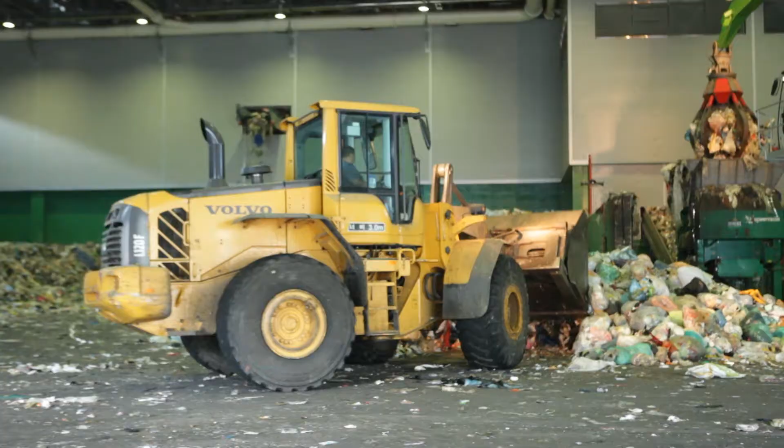The project of utilizing waste as fuel, which uses waste as the source of energy, resolves the chronic problems of waste treatment, leads to affordable production cost, replaces fossil fuel in this era of high oil prices, and reduces greenhouse gases, so it is receiving limelight as future energy.

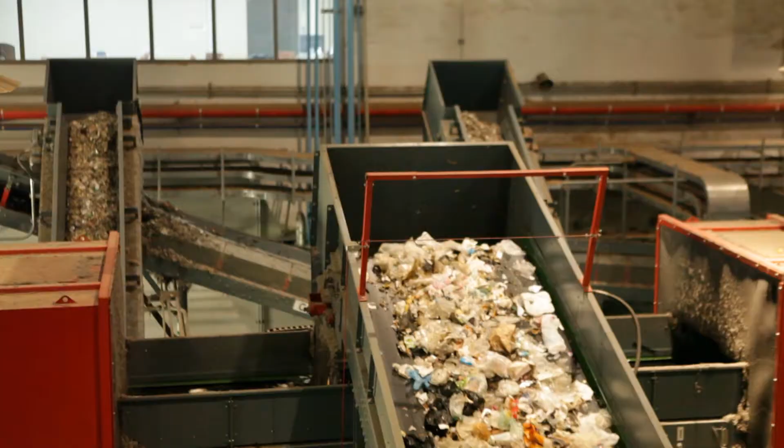The project of utilizing MSW as fuel moves away from the existing landfills or incineration, mechanically classifies the waste for treatment before being turned into fuel. It is a groundbreaking project that transforms waste into renewable energy. Moreover, it is a core project of green growth that is able to generate additional revenue by securing CERs.

The project of turning Busan metropolitan city's MSW into fuel and the execution of the private investment business was implemented in BTO method together with the main office of Busan City, busanE&E, the principal, consortium of construction companies, POSCO E&C, and 3 others, Korea Environment Corporation, the institute that managed and supervised the project.

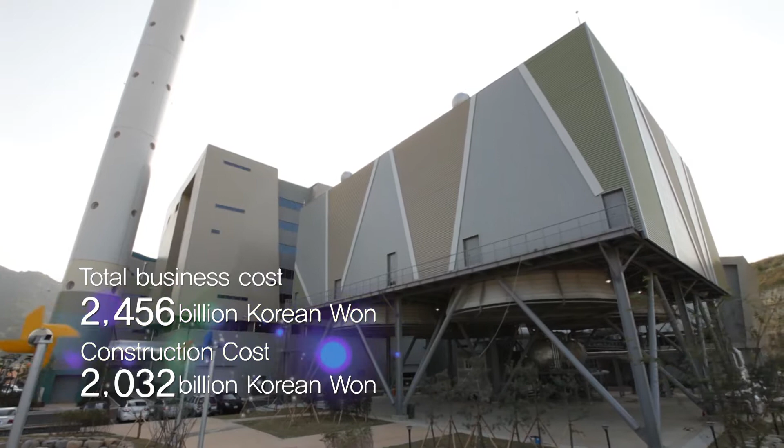The construction took place on a land of 23,932.36 square meters out of the lot area of 66,653.7 square meters in the entire Saengok-dong in Gangseo-gu, Busan metropolitan city.

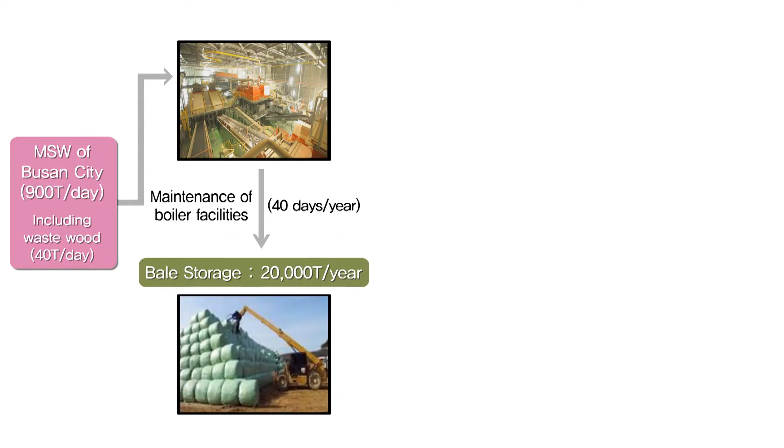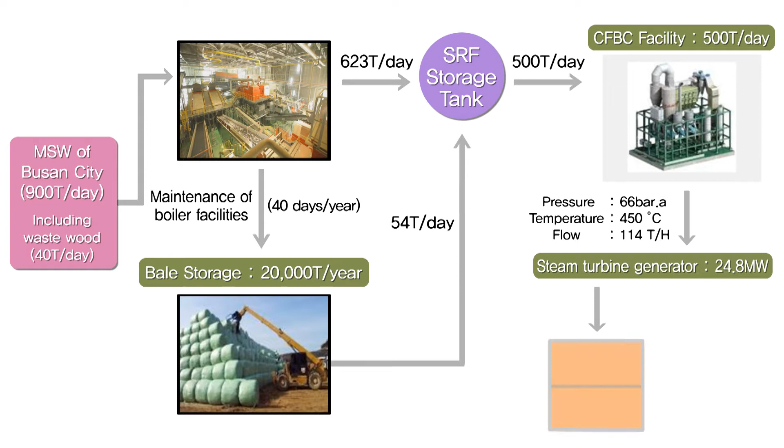The project of turning MSW into fuel involves delivering MSW, classifying them, producing SRF, incinerating, and producing electricity. It is an innovative next-generation growth engine, and the annual treatment quantity of waste has reached 234,900 tons, generating 196 gigawatt-hours of electricity annually.

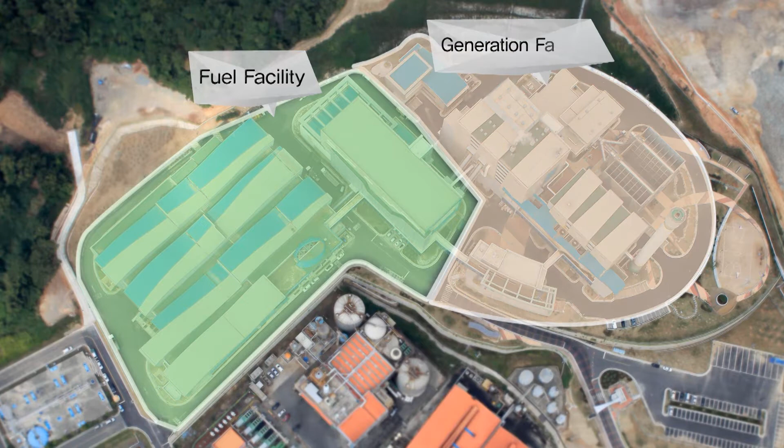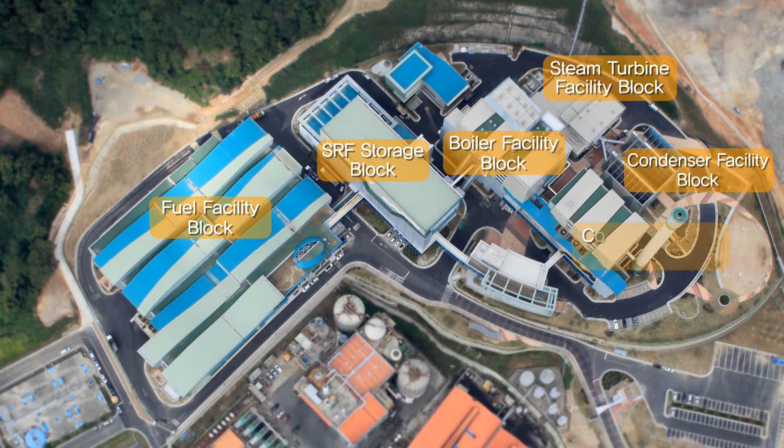The facilities of turning MSW into fuel and the private investment project for generation facilities are largely categorized into fuel facilities and generation facilities. The facilities are comprised of turning MSW into fuel facility block, SRF storage block, boiler facility block, steam turbine facility block, condenser facility block, combustion gas treatment facility block, and management block.

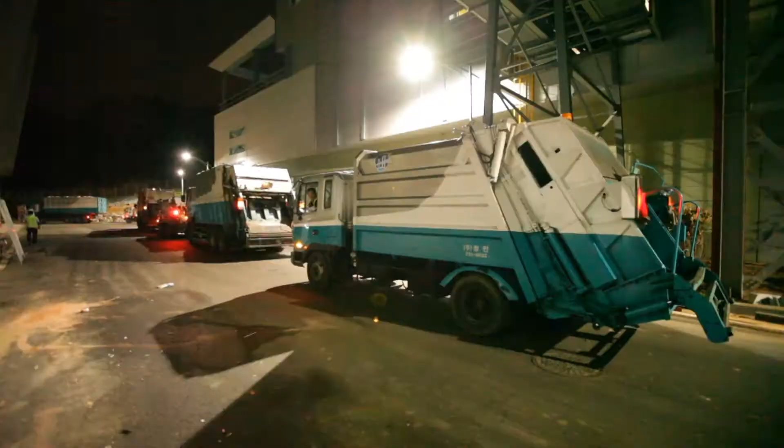The MSW fuel facility block has been designed and constructed as an environmentally friendly facility with logical flow of production process and maximized efficiency. 900 tons of waste material is collected per day from each of the 16 boroughs and county regions throughout Busan metropolitan city. The collected waste material is weighed using a self-weighing meter, which is then transferred and unloaded in the waste entrance zone using a wheel loader.

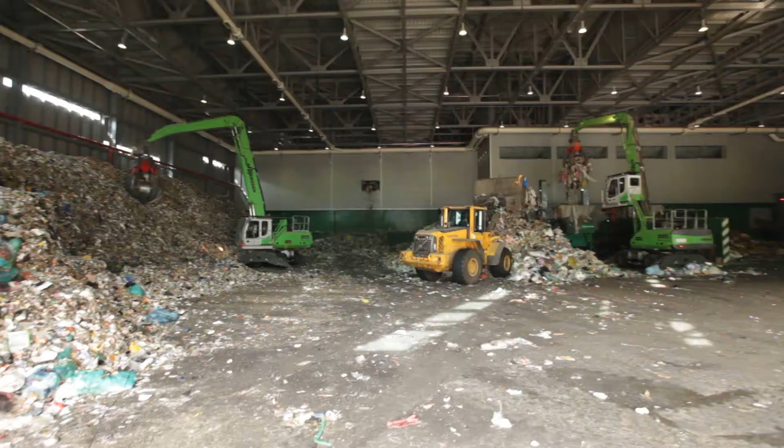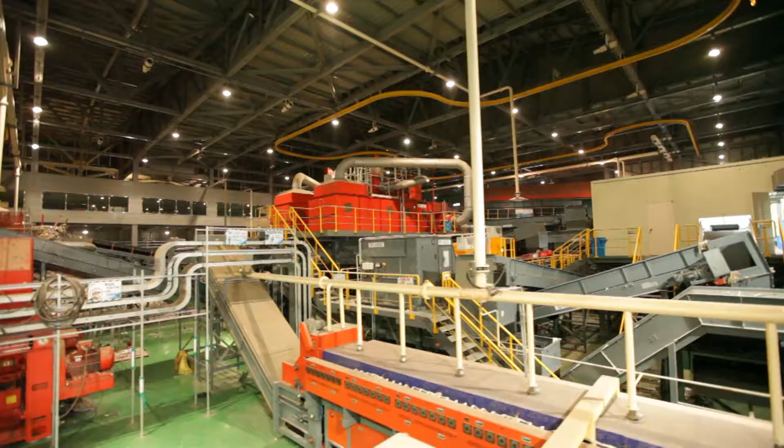The temporarily stored domestic waste material is transported to the collecting zone using a wheel crane. It is then crushed to sizes of under 200 millimeters and transferred to the mechanical pre-processing facility. In trommel screen, which is a screen device, the waste is separated into that below 200 millimeters and that above 200 millimeters. The waste that is above 200 millimeters is transported back to the delivery site.

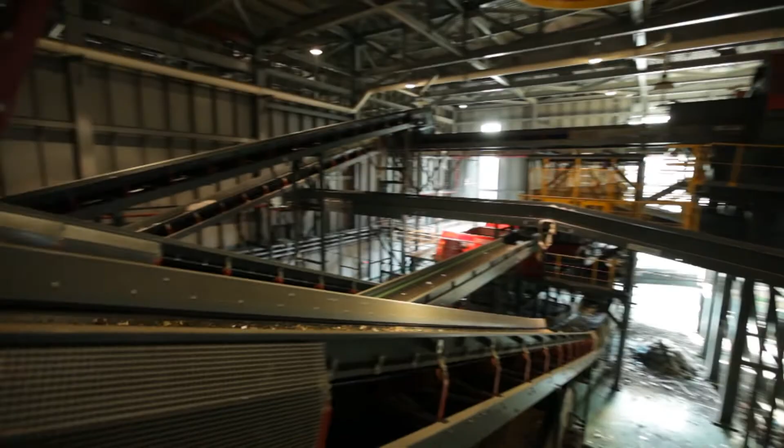The separated waste is classified into below 80 millimeters and 80 to 200 millimeters in size, and the waste that is between 80 to 200 millimeters is transported to the pneumatic separator to be separated into heavy and light substances. The heavy substances undergo a vibration feeder and are transported to the optical sorting machine.

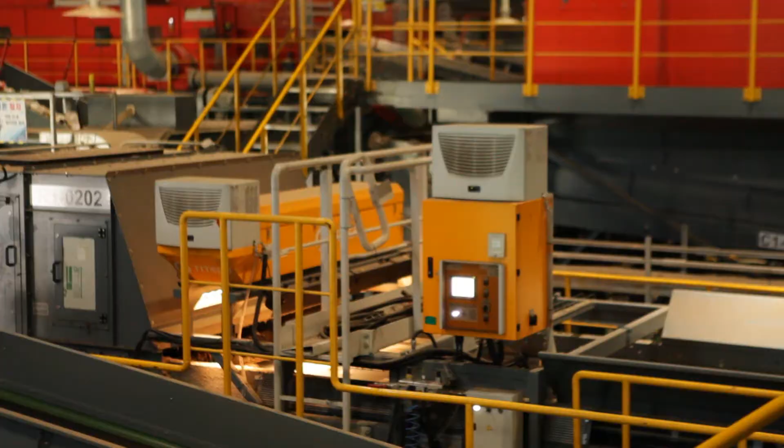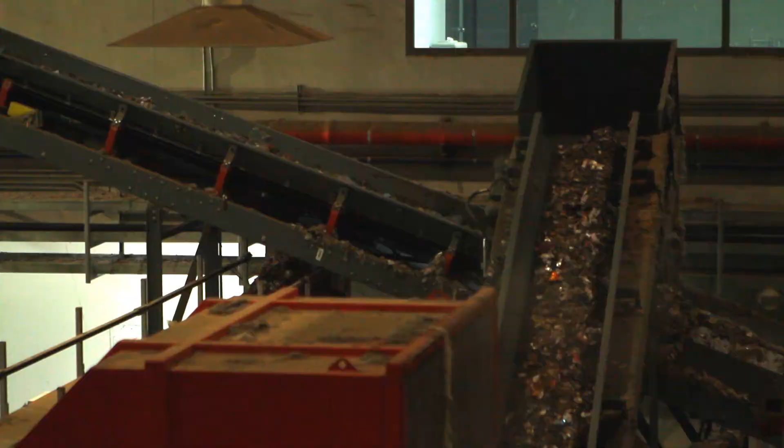Here, the waste is divided into combustibles such as paper and plastic, and in particular, a dedicated classification site is being operated for substances that increase the recovery rate of combustion, such as diapers, and the non-flammables, such as glass bottles, cans, and aluminum, are classified and collected respectively. The light substances are finally pulverized in the combustible pulverizer and transported to the SRF storage tank.

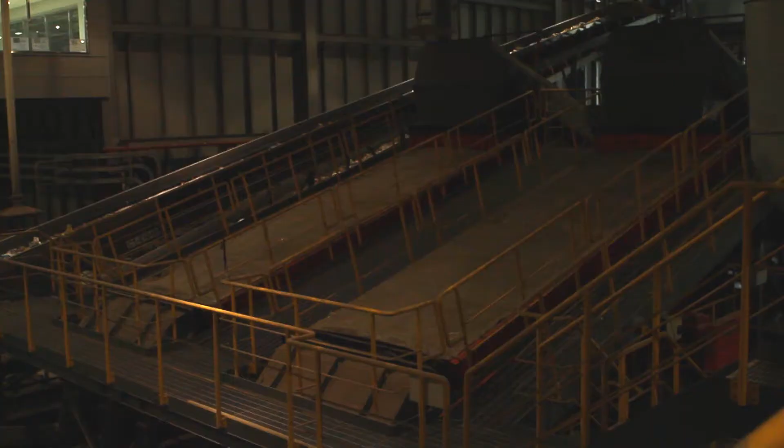Waste below 80 millimeters is classified in the magnetic sorter and non-ferrous metal sorter. The waste undergoes the flip-flop screen and is transported to the SRF storage tank through the small-sized pneumatic sorter.

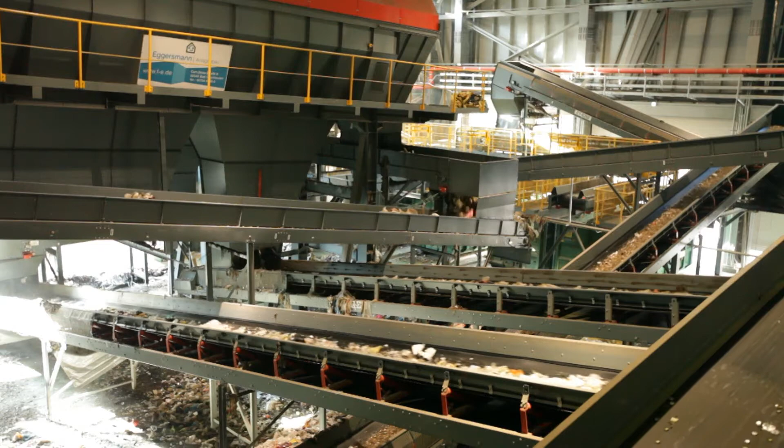The combustible substances classified as such are finally pulverized for easy combustion and are reborn into derived fuel, in other words, SRF. In particular, fluff SRF applied to this project is economically and environmentally valid when compared to the pelletized SRF, which has gone through the dry formation process, and is appropriate for producing electricity through high-efficient generation.

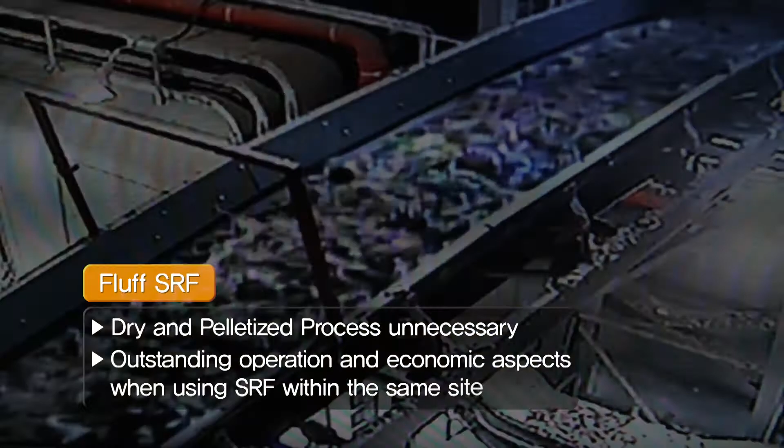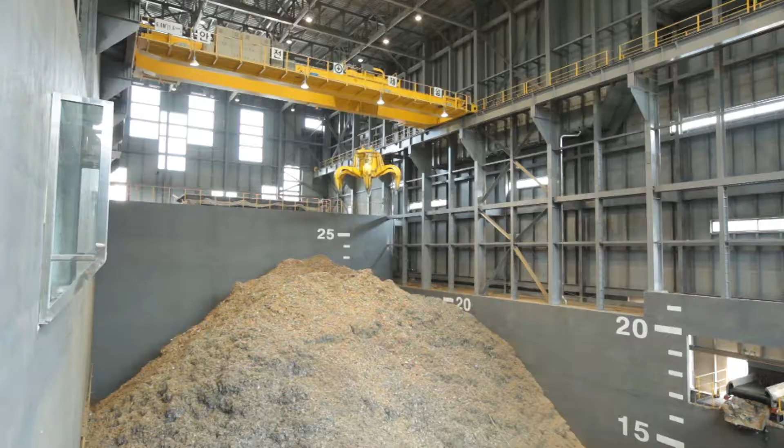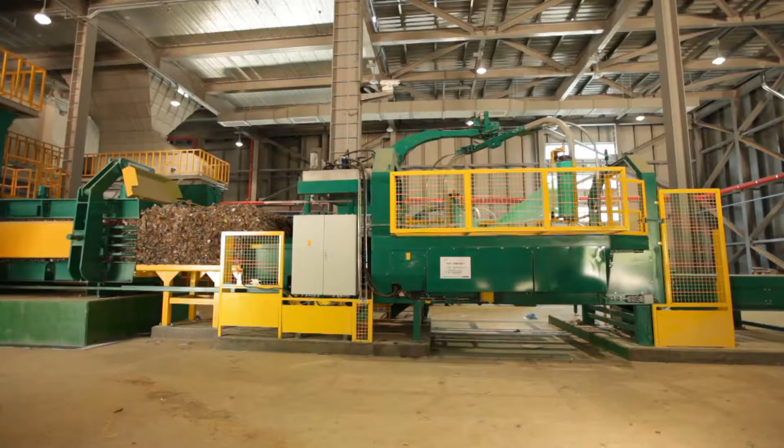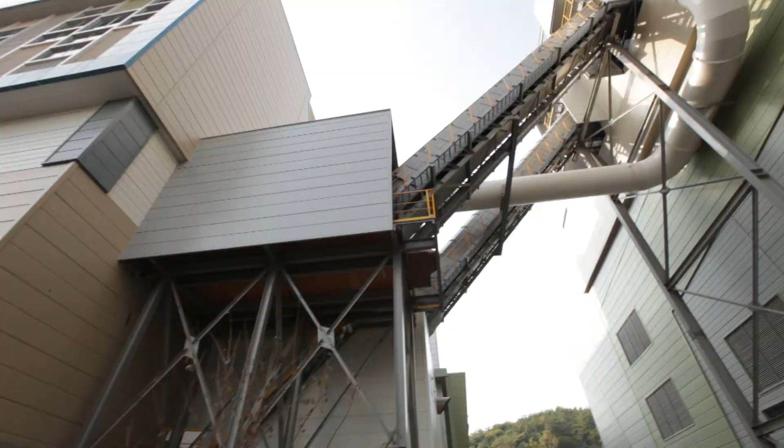In addition, during the maintenance period of the boiler facility block, it is compressed, packaged, and stored outside so that SRF can be produced continuously. The SRF in the storage tank is transported to the boiler facility block through the supply conveyor.

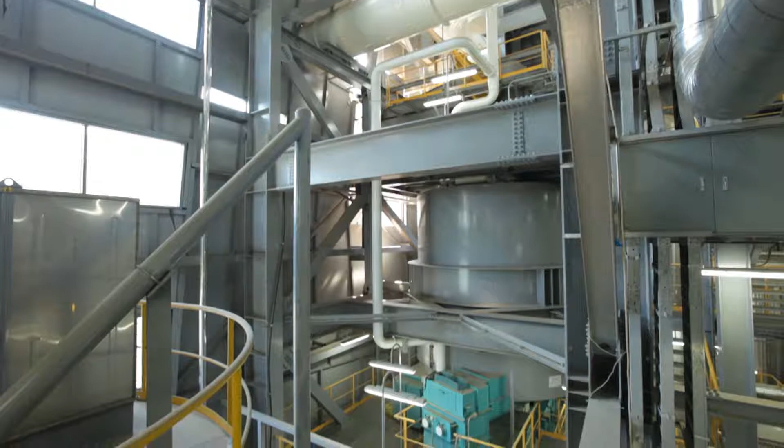The facilities in the boiler facility block have been constructed by entering into a contract for technical cooperation and exclusive supply with Andritz of Austria, which possesses the world's best technology in the field of waste-derived fuel for generation of electricity, so stable advanced technology has been applied locally.

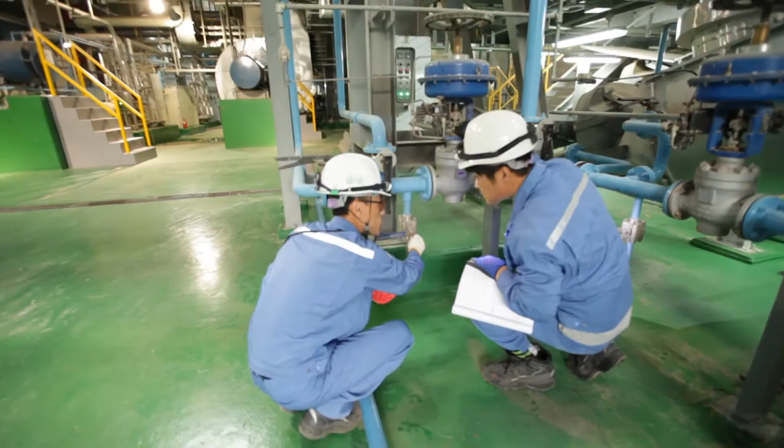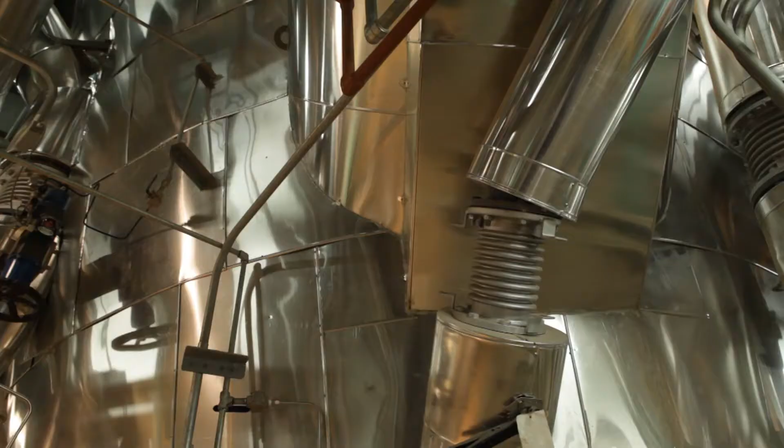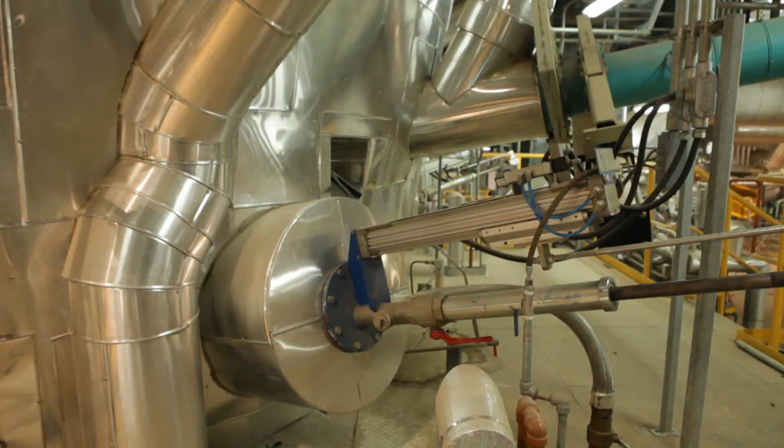An external circulation type of fluidized bed boiler, CFBC, which has been applied with special combustion technology suitable for waste-derived fuel, has been used, and as for combustion, it is comprised of cyclone, loop seal and fluidized bed heat exchanger. The internal part of the boiler's combustion room has a high temperature of approximately 900 degrees Celsius of air pressure, leading to complete combustion.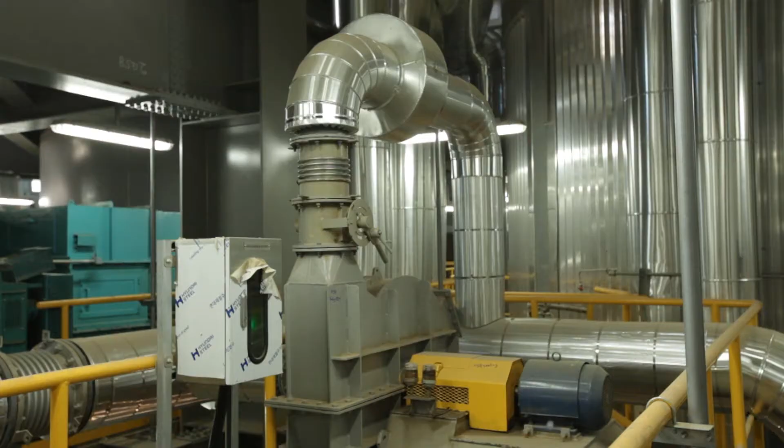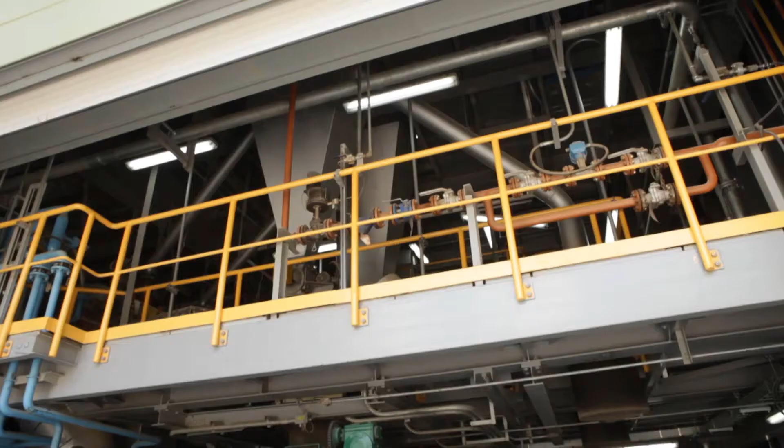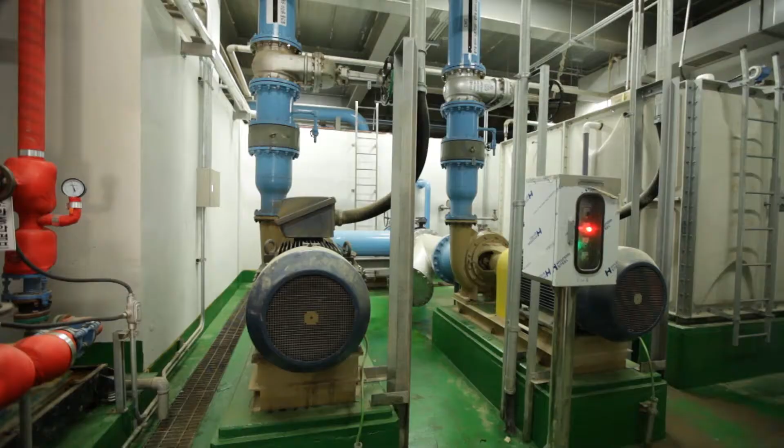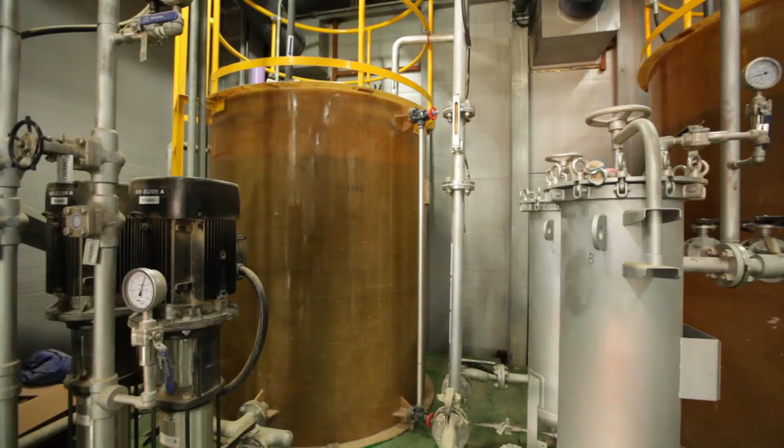The boiler facility block and the combustion gas processing facility block, which are the core facilities of producing fuel and generation facilities, have been allocated in horizontal links considering the flow of the process. The combustion gas processing facility removes air pollutants such as dust, acidic gas, and dioxin derived during the combustion process by using a hybrid system, so the emission is strictly controlled before discharge, way below the legal standard.

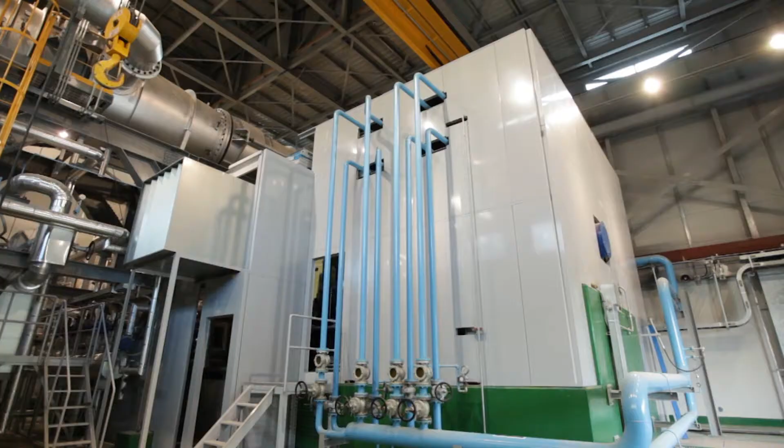In the turbine generation block, high temperature steam of air pressure of 60 atm, that is more than 400 degrees Celsius, is produced, and with the steam turbine, 24.8 megawatts of electricity is generated per day. The entire quantity produced, other than the on-site power generation necessary, is sold in the power exchange. The generated power annually is 196 gigawatt hours, and it generates revenue of 15.9 billion Korean won.

Furthermore, by creating amenities and sports facilities around the site, efforts have been made to transform the image of waste plants being detestable facilities. During the planning and commissioning stages, efforts were made to create a comfortable rest area, pleasant environment, and an environment-friendly area in a region filled with clean energy.

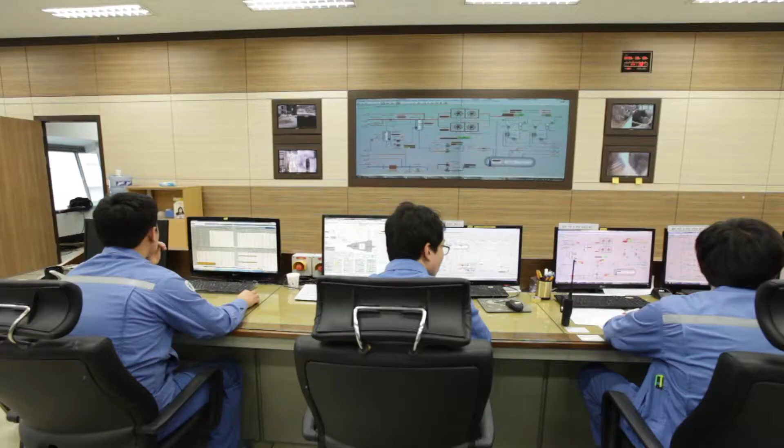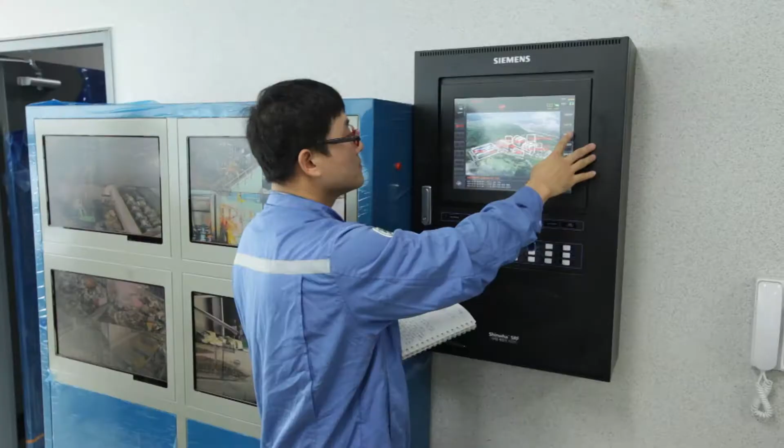All facilities in the MSW-derived fuel are controlled in the central control room established with a system of cutting-edge technology. In the central control room, the progress in each process can be managed, and in case of problems, it allows prompt actions to be taken, making it optimal for operation. busanE&E, with ample experience and advanced technology, is undertaking stringent management and is responsible for error-free operation for the safety of fuel and resource facilities, as well as for the successful implementation of the project.

Our future depends on the new perspective on waste and how to create renewable energy and resources rather than how things are produced. MSW, which was treated with contempt, is taking a new turn as useful resources and as being considered a cleaner and healthier environment through the project that transforms MSW into resources. Now, the project of turning MSW into fuel will realize the positive value by considering it a contribution to the citizens of Busan as well as the society for mankind.